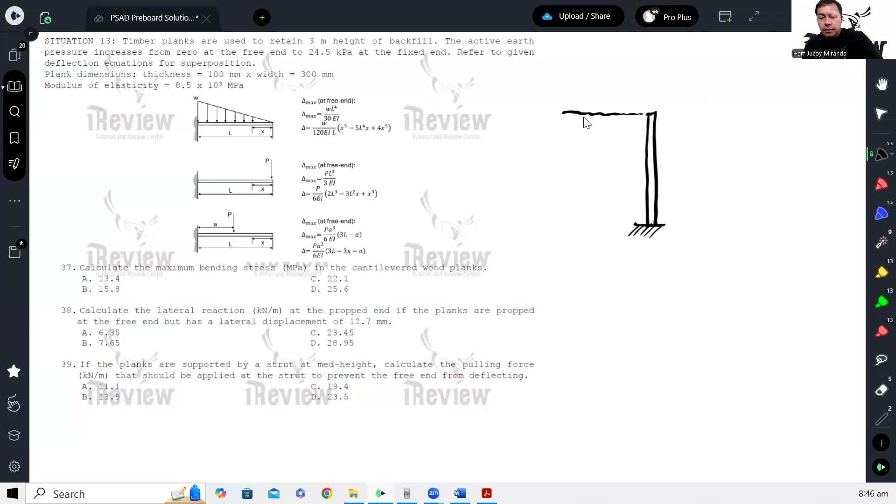The soil pressure is 0 at the free end and linearly varying up to 24.5 kilopascals. So it looks like this.

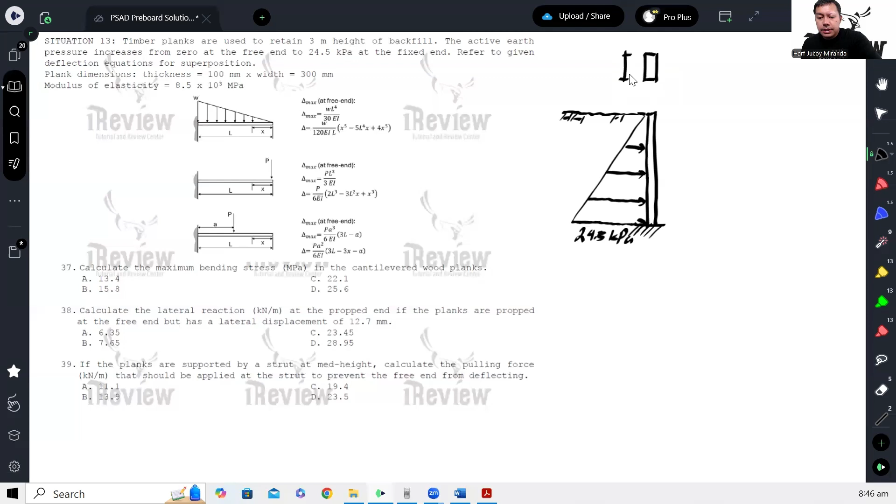So in this case, we are asked: what is the maximum bending stress in the cantilevered wood plank? Again, the cross-section of the wood plank is like this: 300 millimeters width, and the thickness is 100.

So when force is applied here, our plank will bend about this axis. So the moment of inertia would be BH cubed over 12, where B is 300.

So that's 300 times 100 cubed over 12. We'll store that for later on the calculator.

We also need the maximum moment. The maximum moment will obviously occur at the base, so that's our maximum moment. To calculate that, we just need to analyze this.

So let's get the equivalent horizontal force of the soil, and the moment arm for that is 1/3 of the height. The height given is 3 meters. So let's calculate.

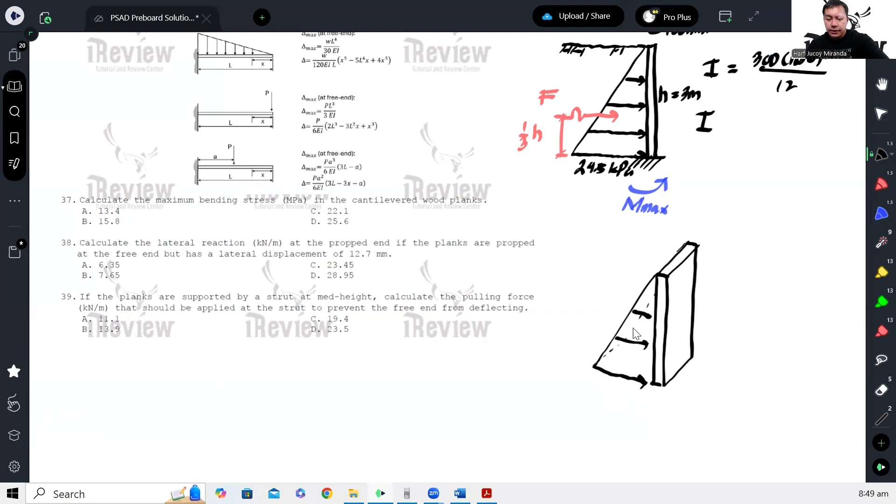Since kilopascal is kilonewton per meter squared, to convert it to kilonewton per meter, we need to multiply by this tributary width, which is 300. So to convert this into kilonewton per meter, we have 24.5 times 0.3.

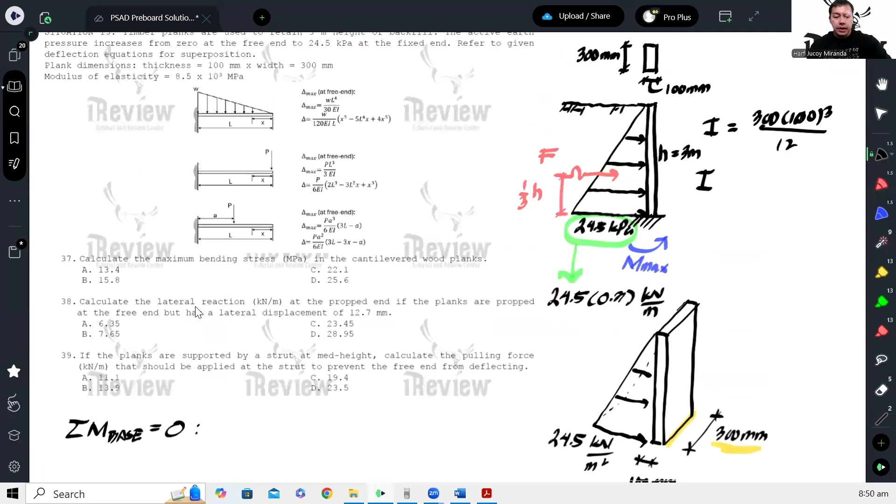From there we can now calculate the maximum moment by taking moments at the base. Summation of moment at the base equals 0: we have the force, which is 1/2 times base, 24.5 times 0.3, times the height of 3 meters, and the moment arm is 1/3 of 3. That equals our maximum moment.

Our maximum moment would be 1/2 times 24.5 times 0.3 times 1, since 1/3 of 3 is just 1. So we get 11.025 kilonewton-meter.

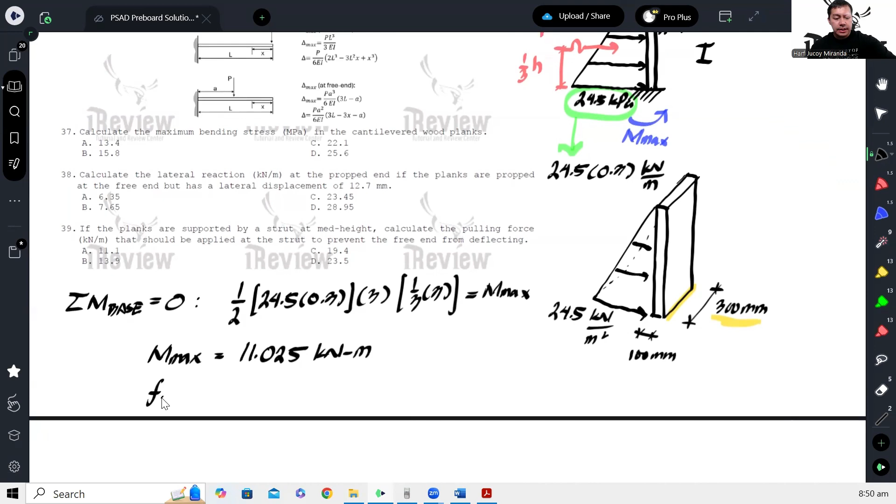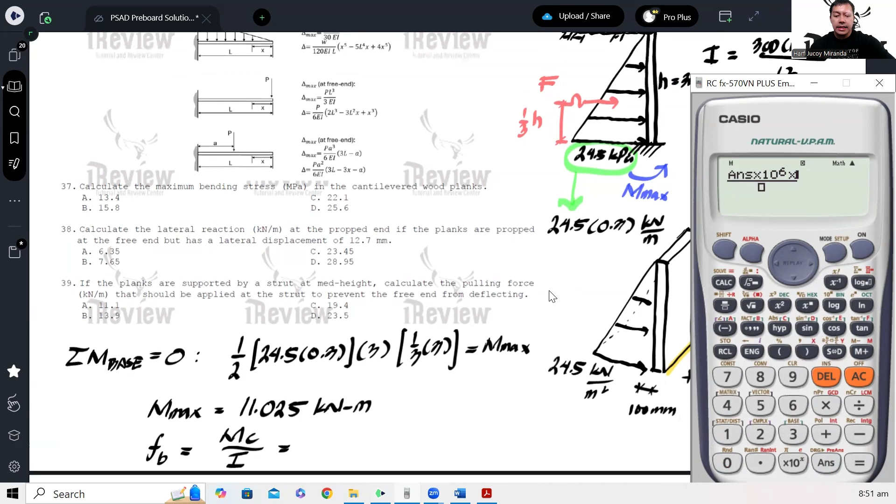From here we can now calculate our maximum bending stress, which is MC over I. C is half of the depth, which is half of 100, so 50, over BH cubed over 12. We multiply by 1 million to convert to Newton-millimeter, and that gives us the answer: 22.05 megapascals.

So this is for number 37.

Next, calculate the lateral reaction at the propped end if the planks are propped. So now, if it's propped, that means we'll place a support here, so it becomes like this.

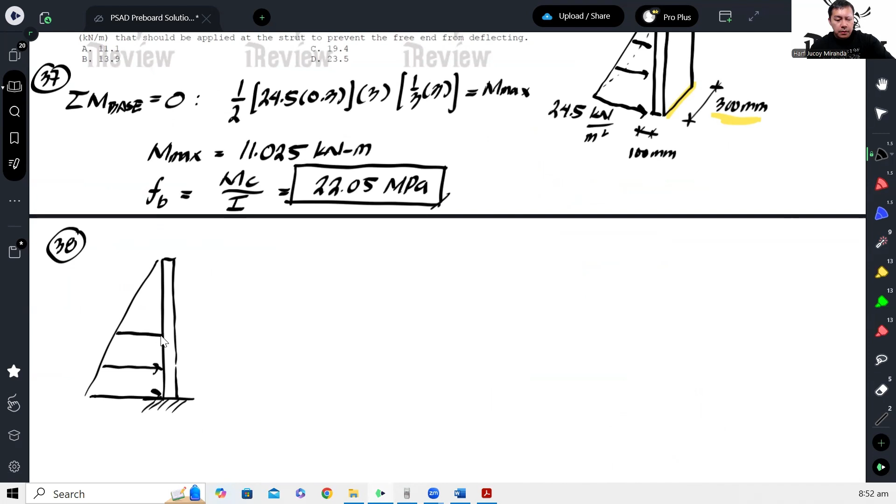So ito ay 24 times 0.3 pa din. Pwede nyo kumpitin pero hindi ko na kumpitin. Tapos ito naman yung merong prop end, no? So pinapahanap yung lateral reaction, pinapahanap yung reaction dito.

Okay? So again, sa 2D sense or sa 2D view, yung magiging magnitude ng reaction natin dito is magiging kilonewton, kasi naka-uniform load. So ibig sabihin yung magiging sagot natin dito mamaya, i-convert pa natin into kilonewton per meter. All right? So let's solve.

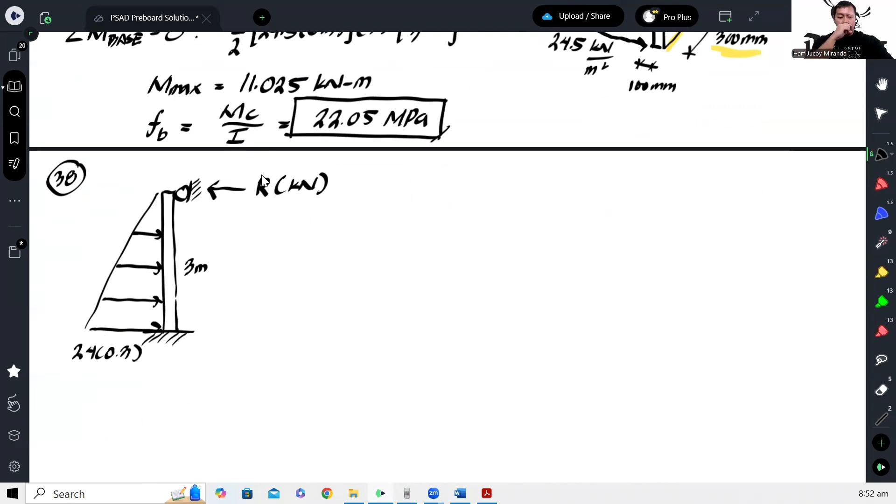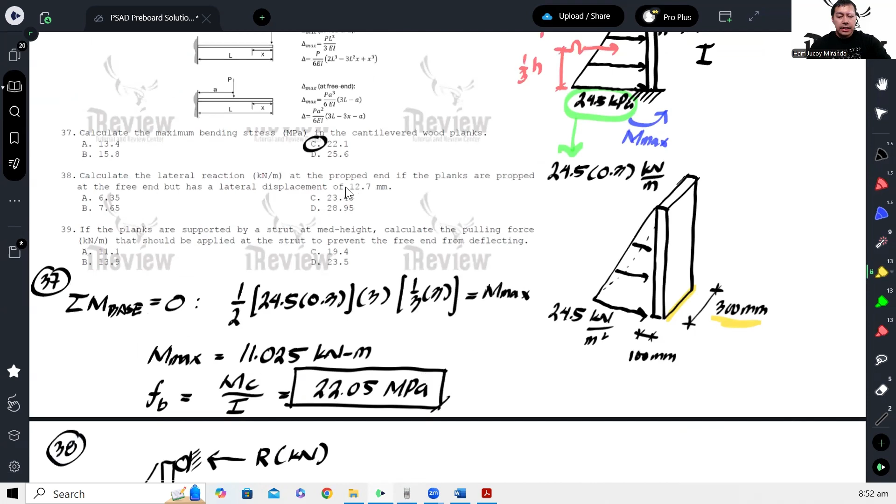Dito daw, o nga pala, bago ko makalimutan, may sinabi na meron daw lateral displacement na 12.7. So hindi pala ito rigid, no? Meron siyang displacement na 12.7. So ibig sabihin, using the concept of superposition, bali ito eventually magkakaroon na pa rin ng ganitong displacement. Meron pa rin siyang 12.7 na displacement.

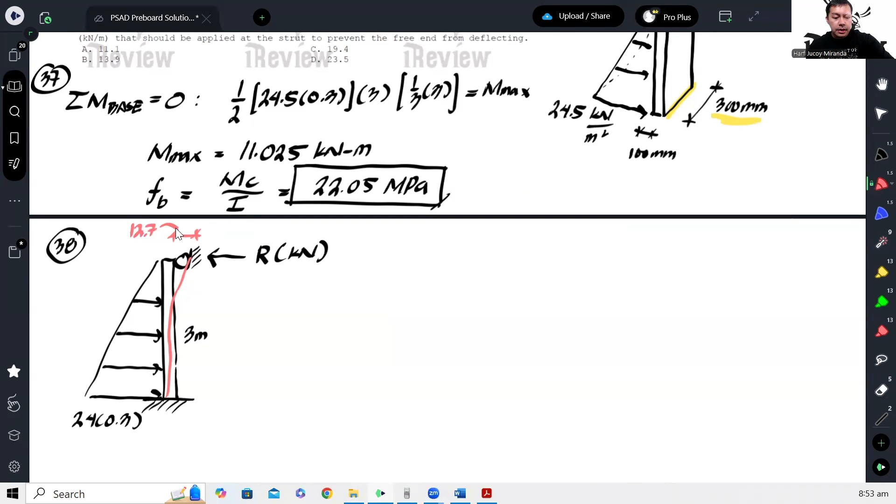Okay? So, paano nangyari yon? Kasi this is equal to a cantilever na merong triangular load.

Okay? That will have a deflection, na tawagin ko na delta 1. Tapos, plus, kapag naglagay ka na dito ngayon ng support, naglalagay ka dito, dahil doon sa support, meron ka dito reaction na R. Okay, yung reaction na R na yan, meron ding ipoproduce na deformation. Matawagin natin na deformation 2.

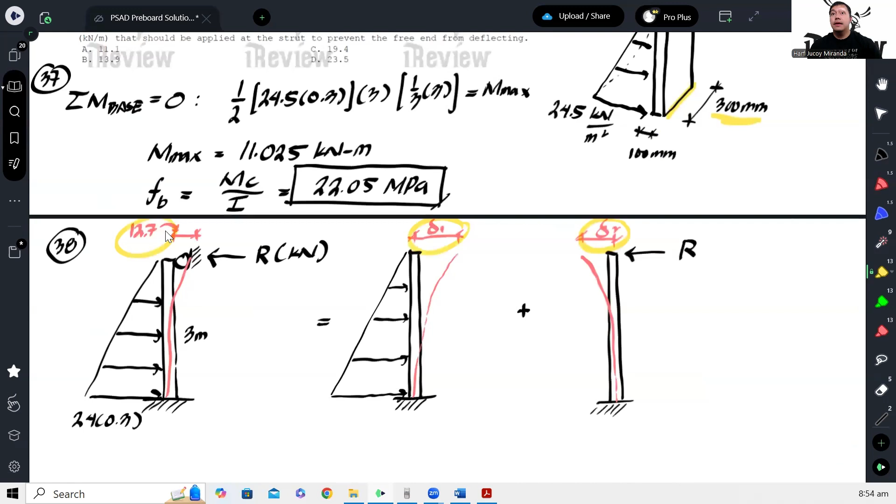Okay? So dapat pag pinag-combine natin itong dalawang deformation na to, ang resulta 12.7. Okay, ganun lang yung idea. So we will have deformation 1 minus deformation 2 should be equal to 12.7 millimeters. Ngayon, ano ang deformation 1?

So, kung wala ang binigay na formula, medyo mahaba-haba yung discussion na to, kasi diderive pa natin. Pero may binigay naman yung formula. So, yung deformation 1 is caused by the triangular load. So, ito yon, WL to the 4th over 30 EI. So, dito na lang muna. WL to the 4th over 30 EI.

Minus, ito namang due to the concentrated force at the free end, ito naman yun. PL cube over 3EI. So, P, gawin lang natin R yung P. So, R, L cube over 3EI. Okay? And that should be equal to 12.7.

Ayan. Okay? Now, let's now substitute the given. So, again, ito, nakaano na to, kilonewton per meter na to. So, kumbaga, ito na yung W natin. So, pasok na natin. So, we will have 24 times 0.3. Ang length ay 3 meters, gawin na nating mm, over 30 EI. Lagay ko lang 30 EI kasi may values naman tayo nito sa given.

Minus R times 3,000 cube. At the same time, isipin na kagad natin na itong R na to, naka-kilonewton yan. So, para maging Newton, kasi ang goal natin maging megapascal lang to lahat para maging Newton per millimeter lang palagi, magmumultiply na ako ng 1,000 dito pa lang para ma-convert na to sa Newton over 3EI.

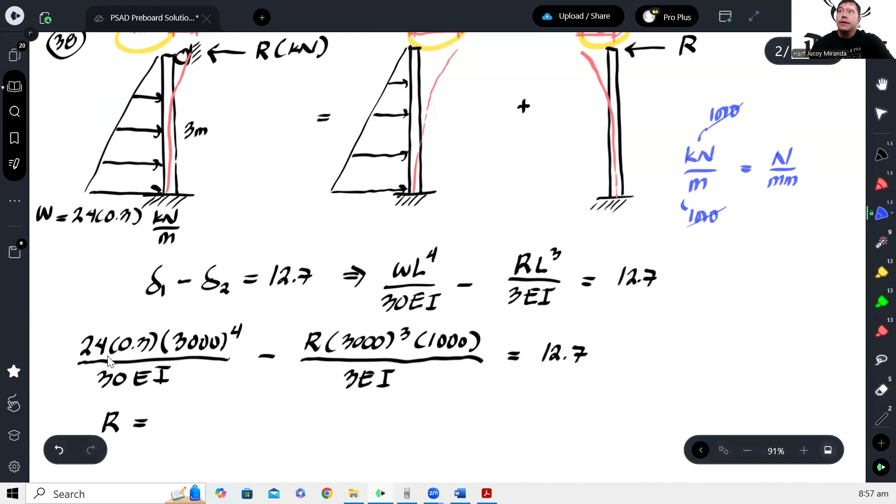Kaya kahit hindi na natin to i-convert. Okay, so that's solved. Times 3,000 to the fourth over 30 EI. So lagay ko na lang yan sa A, yung EI, minus yung hinahanap natin, 3,000 cube times 1,000 over 3 EI, and then equals 12.7.

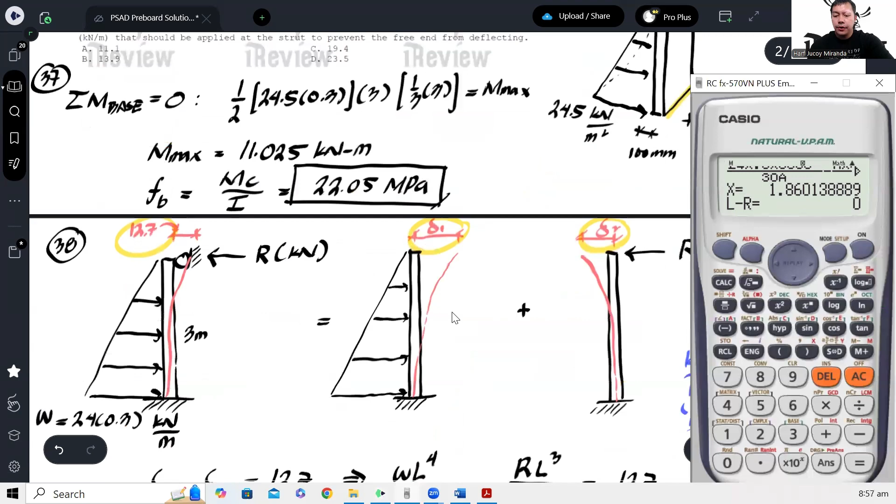Okay, tapos yung A, ano lang. Given sa atin na E, 8.5 times 10 cube, times yung I natin, 300 times 100 cube over 12. Okay? And therefore, our R would be 1.86 kilonewton.

That's not the answer because we need it in kilonewton per meter. So to convert this into kilonewton per meter, we will need to divide this by the width of the plank, which is 300 millimeters or 0.3 meter.

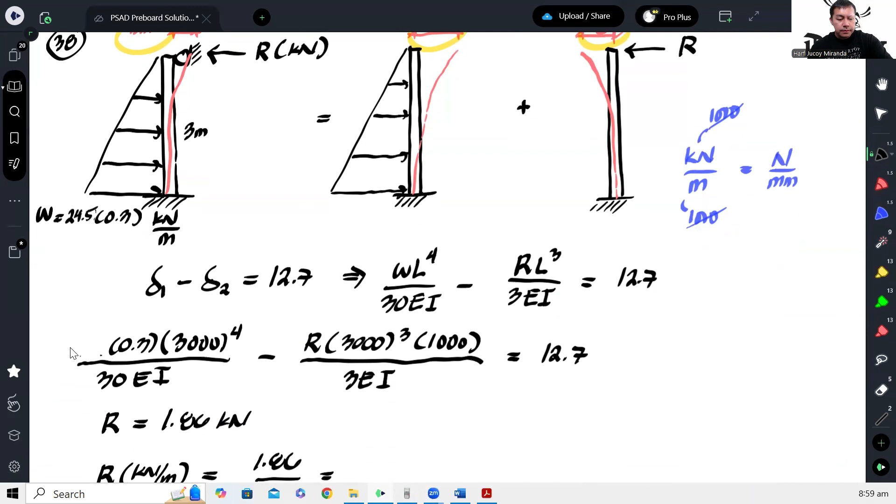Okay, let's redo it. So 24.5 times 0.3 times 3,000 to the fourth, over 30 EI that I placed at A, minus the reaction we found, times L cubed times 1,000, over 3 EI, equals 12.7. There it is. So it should be 1.905 instead.

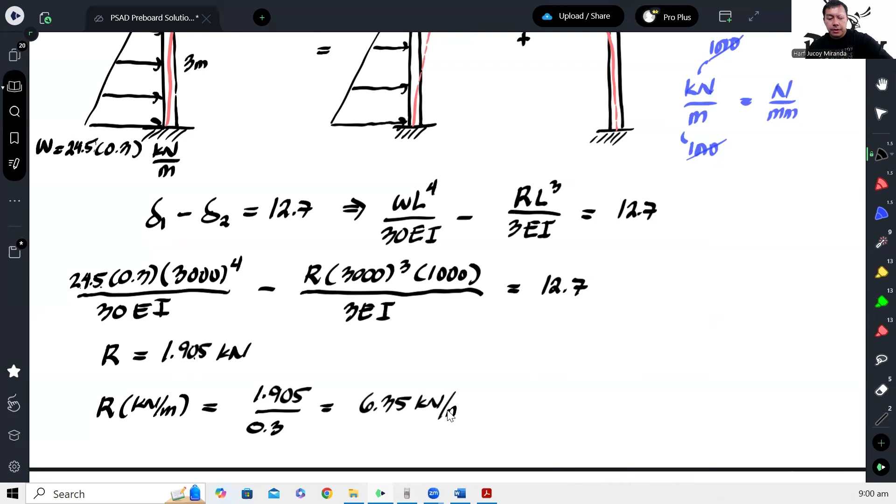Then again, we need to divide this by the effective width of the plank to get kilonewton per meter, and this should give us 6.35 kilonewton per meter. Okay, and that's our answer for number 38, letter A.

Number 39: if the planks are supported by a strut at mid-height, calculate the pulling force in kilonewton per meter that should be applied at the strut to prevent free end deflection.

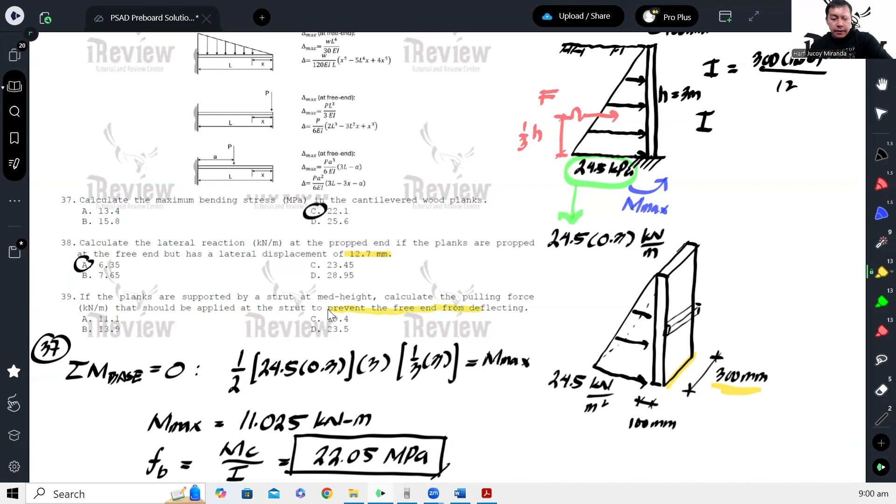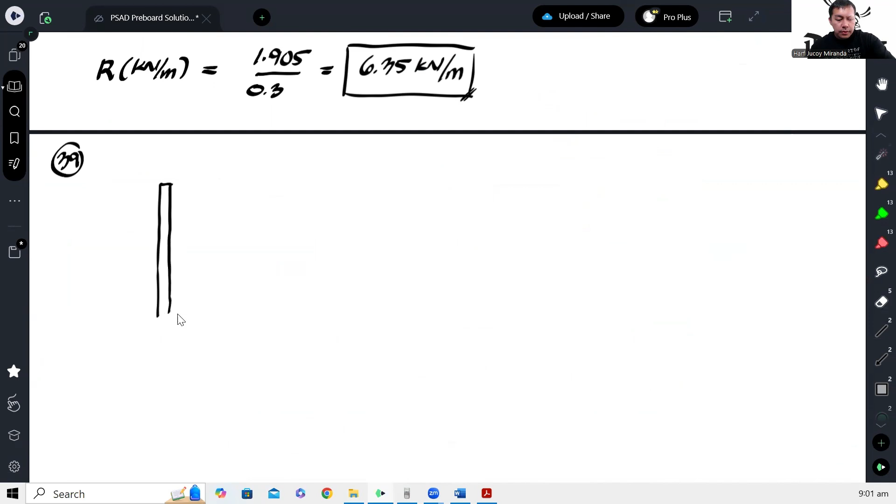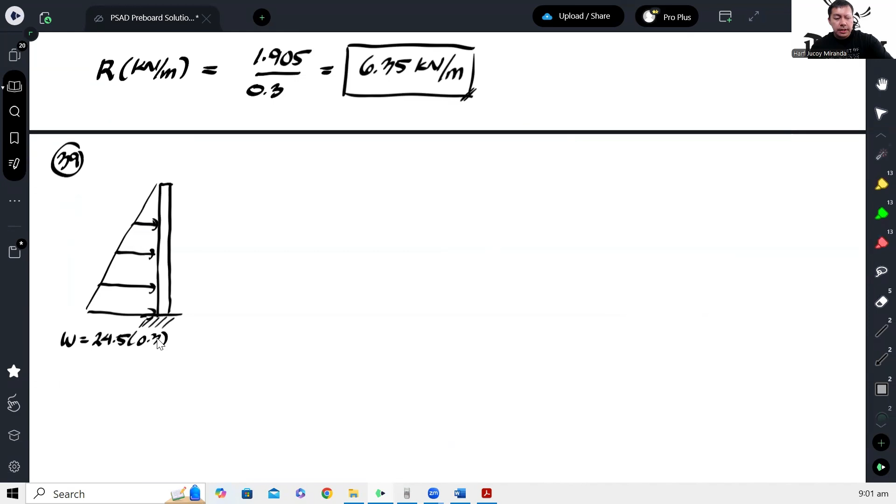So it looks like this for number 39. This is the cantilevered plank, and this is the soil reaction or soil pressure, W equals 24.5 times 0.3. Then we'll place a support at mid-height, meaning at 1.5 meters, 1.5 meters.

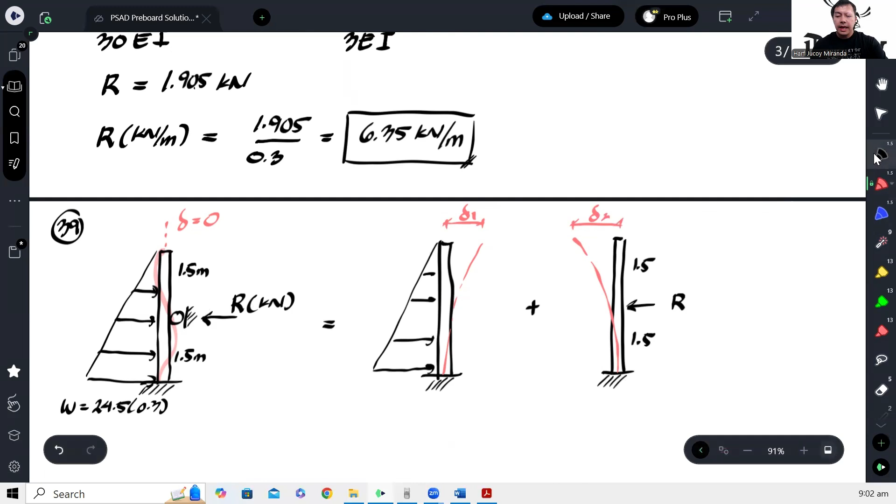So the idea is when we combine the two deflections, the final deflection should be 0. That means we can equate them. Let's equate. So what's the formula here? It's WL to the 4th over 30 EI.

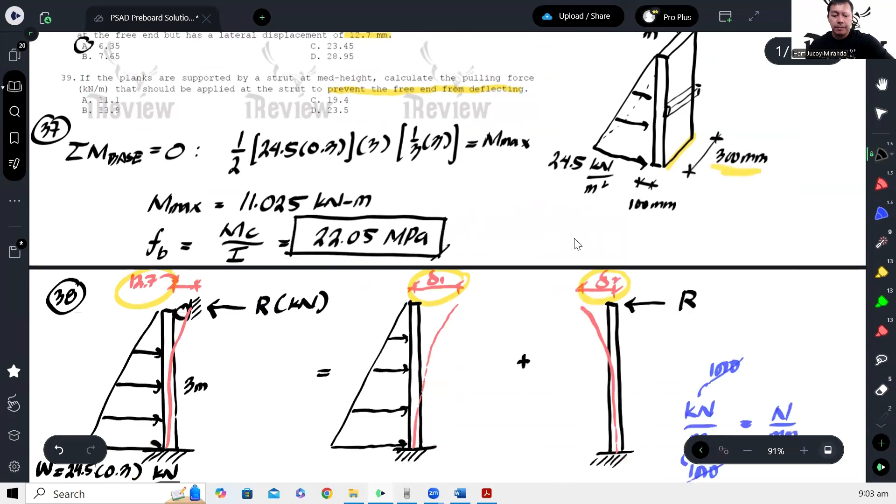So we will have R times L over 2, squared, not cubed, times 3L minus L over 2, over 6 EI. Actually here the EI cancels out, so let's not include it, and from there you can solve for R.

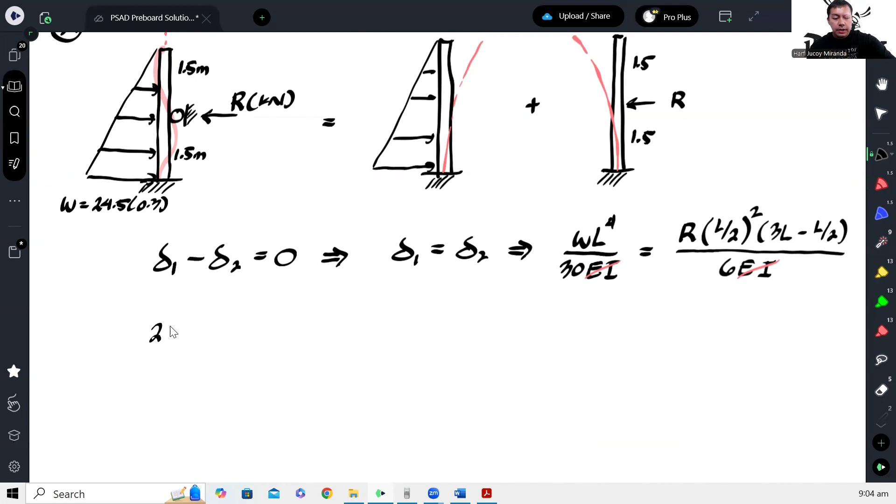So let's write: 24.5 times 0.3 times our L which is 3,000 to the 4th, over 30, no more EI, equals R times 1,500 squared times 3 times 3,000 minus 1,500, over 6. From here we should be able to calculate the required pulling force. Let's solve: 7,056.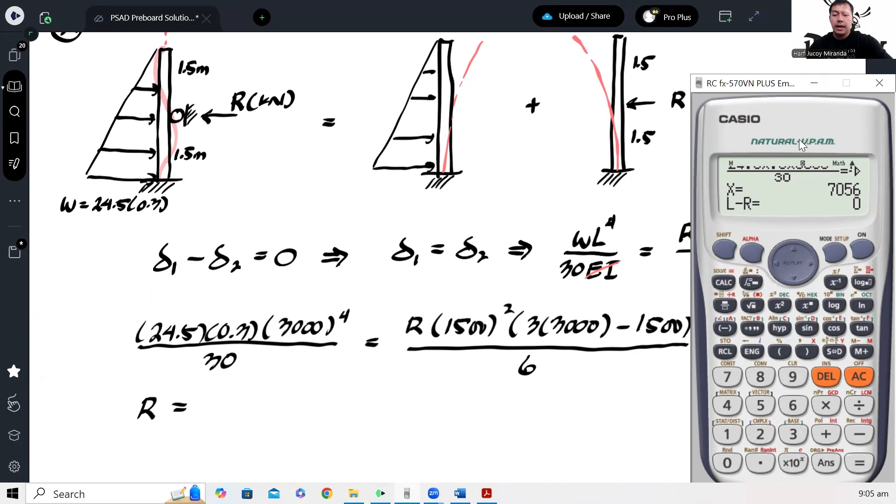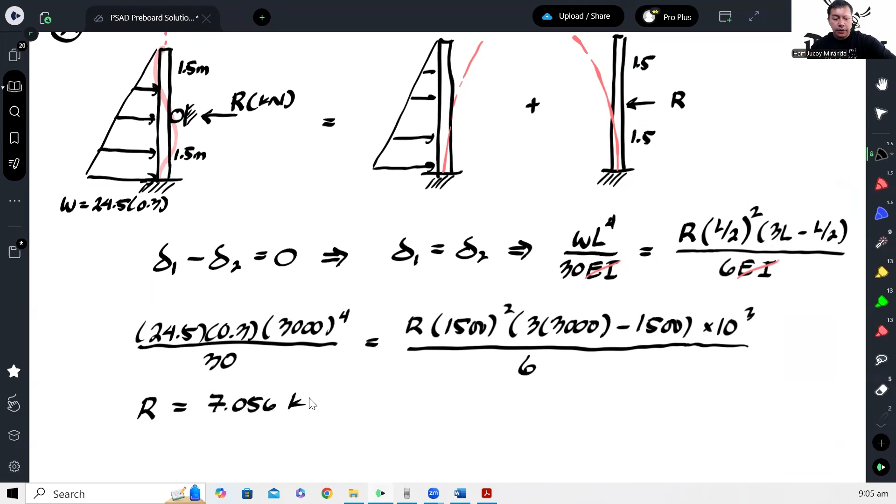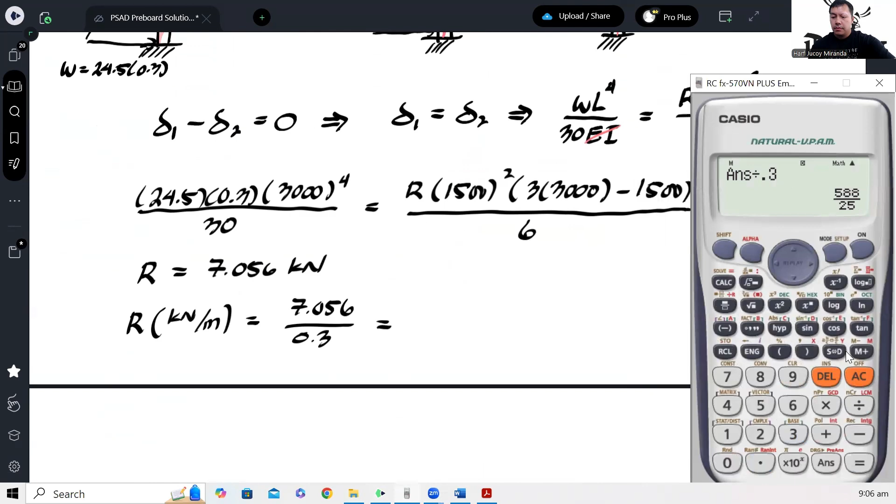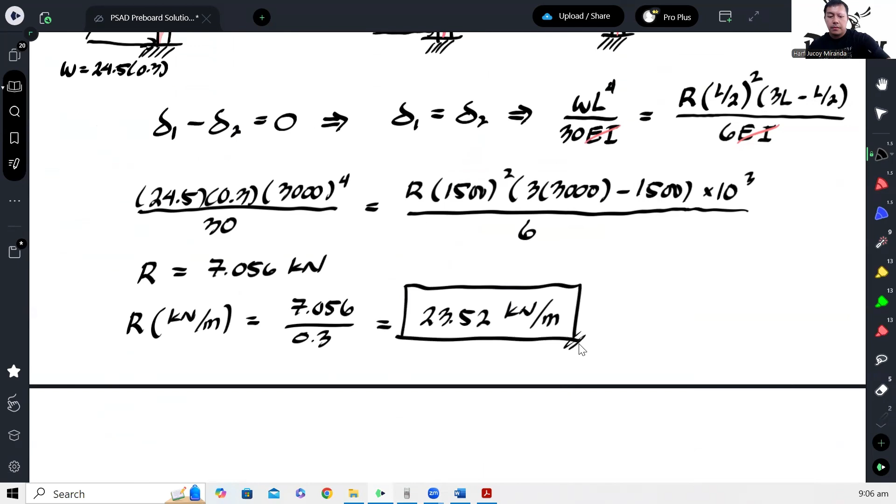So 7.056 kilonewtons. Once again, if I want this converted into kilonewton per meter, we just divide by our computational width, which is 300 millimeters, and that is 23.52 kilonewton per meter. Okay, and that's letter B. So that's it for this particular problem.